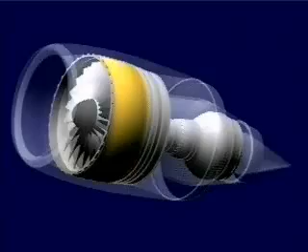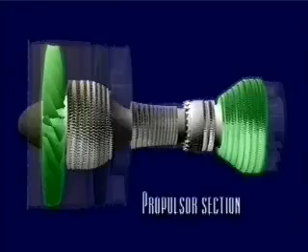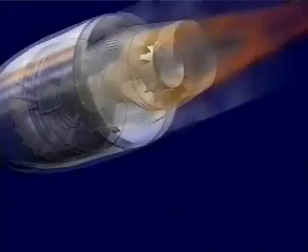The turbofan engine is a complex synchronization of several components working together as two parts: a core section that produces power to drive the propulsor section that produces thrust. Thrust is a force created by the acceleration of air, an application of Newton's second law of motion, commonly expressed as force equals mass times acceleration. It is this force that propels the aircraft.

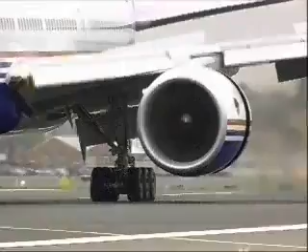To see how this thrust is developed, let's look at the internal workings of Pratt & Whitney's PW4000-112 turbofan engine.

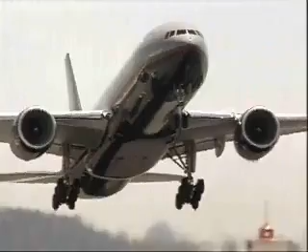The first component in the engine is the huge 9-foot diameter fan that rotates 2,800 times a minute at takeoff. This giant fan sucks in enough air to vacuum out the air in a 4-bedroom house in less than half a second. As the air races through the massive fan, it's separated into two streams.

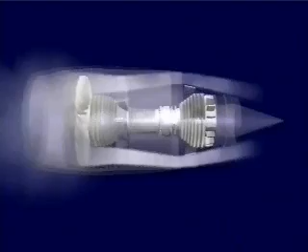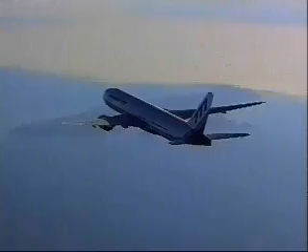Only 15% of the air flows into the interior core of the engine. The remaining 85% is ducted along the outside of the core and forced through an ever-narrowing space, the fan duct, picking up speed along the way. The ratio of air bypassing the core to the air passing through the core is called the bypass ratio. Because of its huge volume, the bypassed air only needs to accelerate a small amount to develop an enormous amount of thrust.

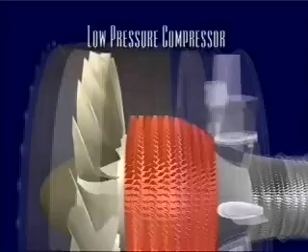Meanwhile, the other 15% of the air has entered the first component in the engine's core, the low-pressure compressor. Here, the air passes through several smaller stages, each consisting of a set of rotating blades between a set of stationary blades. Each stage compresses the air, forcing its temperature and pressure to rise.

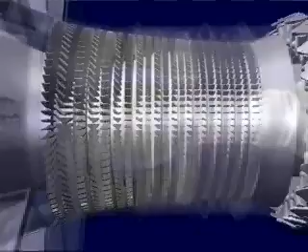After passing through the low-pressure compressor, the air enters the high-pressure compressor, which rotates faster and is responsible for 70% of the total pressure rise. After passing through both compressors, the air is 35 times higher in pressure and 1,000 degrees hotter than the outside air.

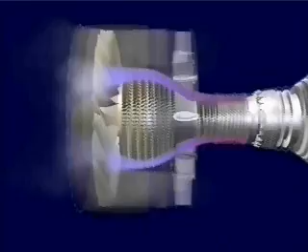The compressed air is now at the right pressure, but it is moving too fast to be efficiently ignited, so it enters a diffuser, where it slows down while remaining at the optimum temperature and pressure.

The air then enters the combustor, where its energy level is greatly increased. This is accomplished by adding fuel through a series of injectors and igniting it, further increasing the temperature of the mixture by 1,600 degrees. The higher the pressure of the air, the more energy will be added during combustion, and the more efficient this process becomes. This is why the compressors were used to increase the air's pressure.

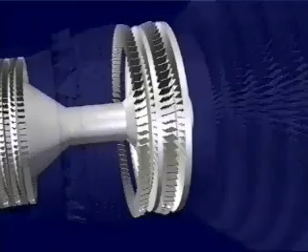Now the superheated and compressed air mixture is ready for the next phase. Blasting through the high-pressure turbine, the high-energy air spins the blades at over 10,000 revolutions per minute. These blades are connected to a shaft that runs through the center of the engine and drives the high-pressure compressor. In fact, the only purpose of the high-pressure turbine is to extract enough energy from the air to turn the high-pressure compressor. Together, these components make up the high spool.

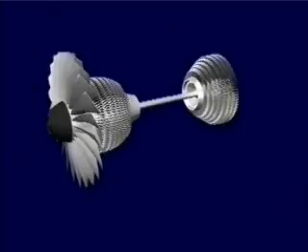Next, the air passes through the larger low-pressure turbine. This turbine has two purposes. First, it extracts enough energy from the air to power the low-pressure compressor at the front of the engine core. These two components are connected via a second shaft, which actually passes through the center of the high spool. However, the second and more important job of the low-pressure turbine is to turn the large titanium fan blades up front. The fan is connected to the same shaft as the low-pressure compressor and low-pressure turbine. Together, these three components make up the low spool.

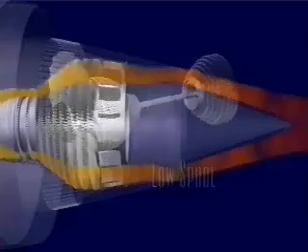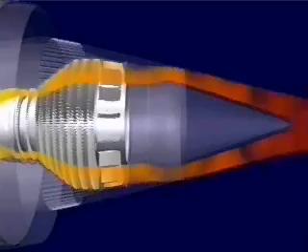Finally, the combusted air races out through the exhaust nozzle at the back of the engine to be accelerated one last time. The speed at which this gas exits the nozzle is called jet velocity. This exhaust stream produces only 20% of the engine's total thrust. The remaining 80% is produced by the large volume of accelerated bypass air exiting the fan duct.